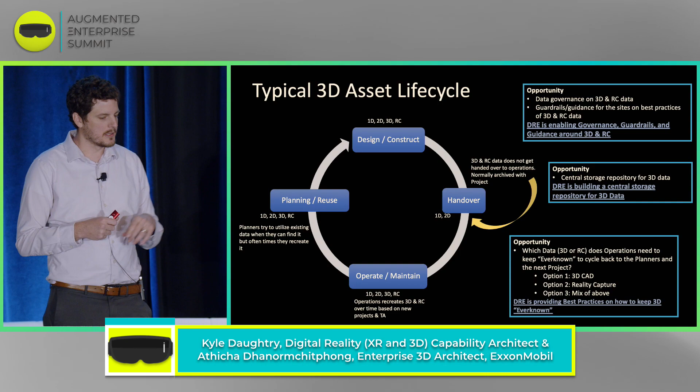Foundation and use cases - you've caught up to where we are now. Capture, store, deliver, consume, right? Set the foundation, stop the inefficiencies. We realized capture, store, and deliver were our foundational efforts. A lot of effort put into that to make sure, and then the consumption channel outputs anytime, anywhere, but use cases are going to drive that.

We've taken our ExxonMobil technology engineering company DIA process: discover, incubate, and accelerate. Discover that technology, you can kind of see where some of those use cases are. Incubate - let's test it out, pilot it at a site. Everything checks off, let's scale that out or accelerate. And again, you can see some of those use cases. For the sake of time, I'll leave it there, happy to answer questions, but we'll keep moving.

So we mentioned it before, split this out into foundation and use cases. There's a lot of things in the data space and simulation space that need to mature. But in the space of visualization, we've got two big things to solve. One's a 3D content management system that's independent from platforms, agnostic to storage of models, and allows us to govern our assets to be able to go into digital twin applications or field apps or whatever they are. There's a missing gap there - I'll put that out to the world.

Geospatial tag database - really, at the end of the day, once I actually have a digital twin, I need to be able to tag information in it. I need to be able to associate that back to our source systems. Being able to do that independently and move between applications is a requirement. There's no monolithic stack that's going to solve everything for you.

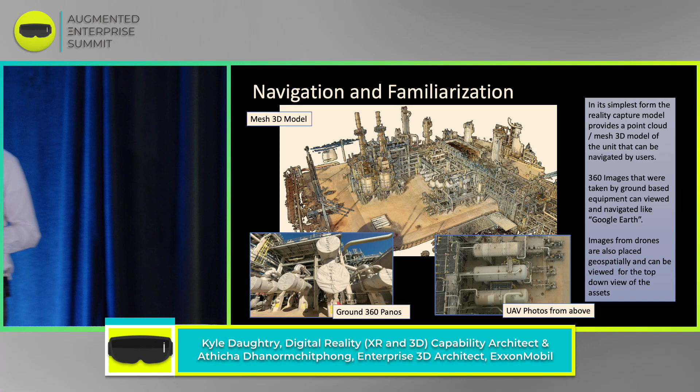Amen. Use cases in action. Wait, I think this is your turn. Rapid fire. Yeah, that'll work. I'll go for it. So really what we're going to show is just a couple of things back and forth.

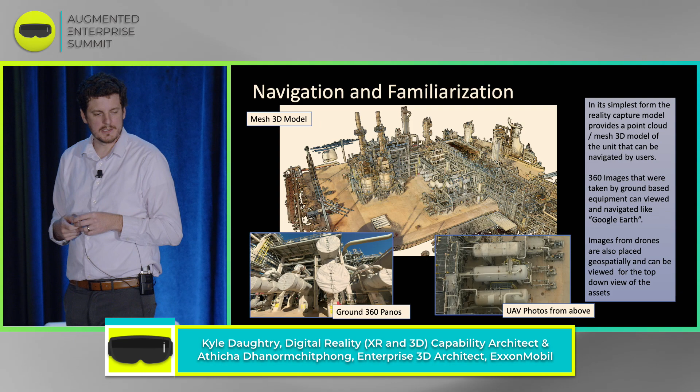This is one of our assets. Really, the basics of bringing reality into the world allows us to get just site familiarization, very easy navigation from panos to the actual scans of the facilities. So it's super easy to understand.

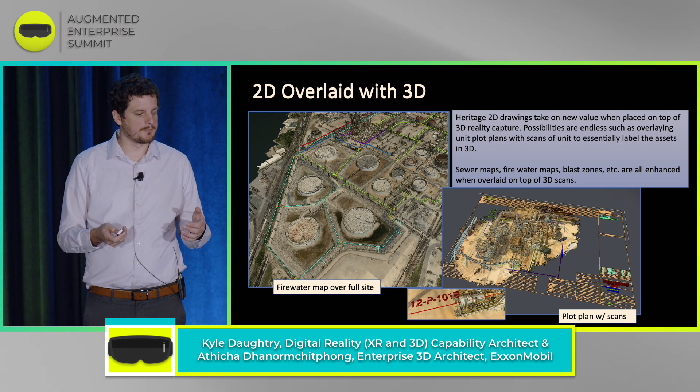Actually, I'll do this one to get us back on track. 2D overlays. At the end of the day, I can go from just creating reality to now I take the standard drawings that I already have, whether it's a blast zone, water maps, or even just plot plans, right? Bring that into the same environment and same area. Everything that we're talking about is trying to bring context to the individual at the time that they actually need it. Planning, scoping, design, troubleshooting.

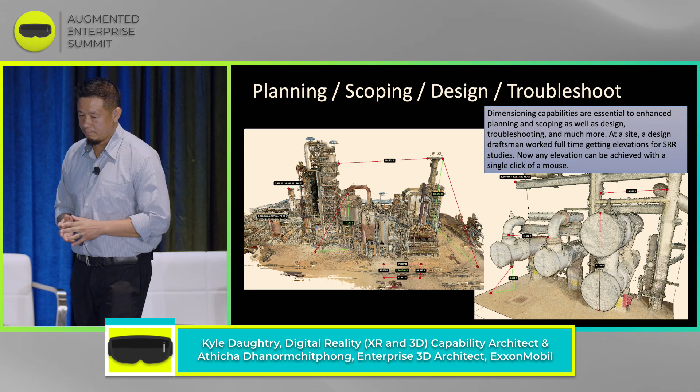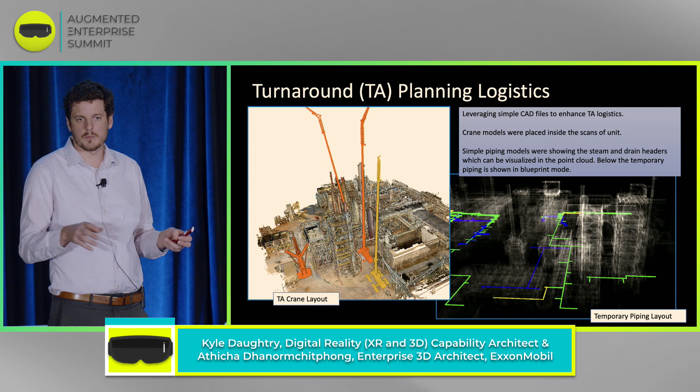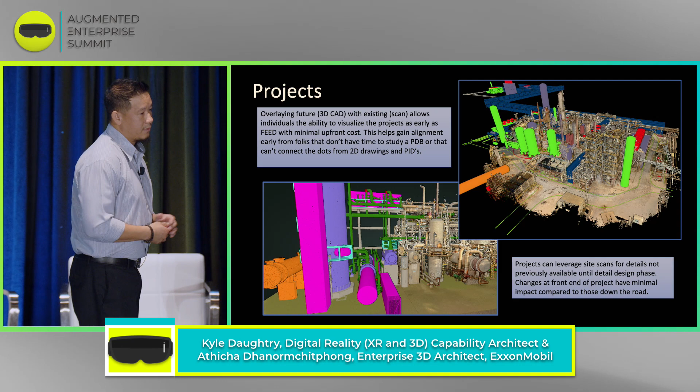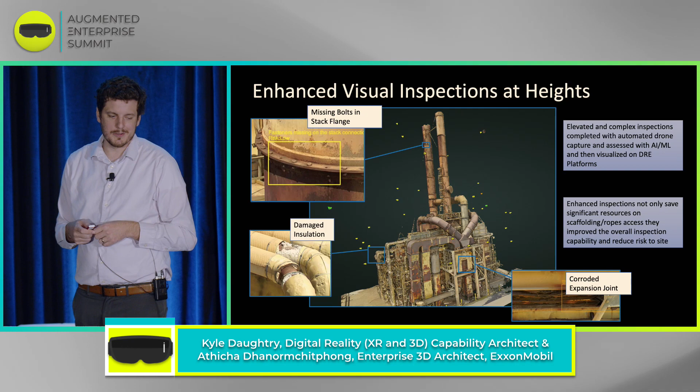Inspections. Really cool thing about this is taking drones and allowing us to capture 3D images, but also using AI to be able to detect things. And whenever I detect things, let me give you more context into the world by throwing an actual dot, red, yellow, green, of whether that inspection is something that you need to look at. Or if it's a hot zone, let me look at all the reds in this particular area. Allowing you to get more context, whether it's missing bolts, insulation damage, corrosion, expansion joints, could be anything, right?

But before that, right, instead of using a visual AI, imagine without AI, you got all those drone shots, and probably somebody's opening up a folder and trying to understand what those images are and where they are. That's what Kyle means by context. I'm going to show you where it is on that asset, so that way that's where the orientation is. And I'm only going to show you things that have anomalies visually.

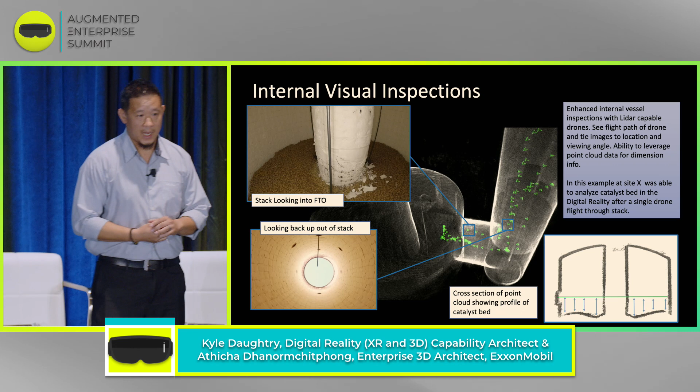Same thing with internal visual inspections, right? Instead of sending a drone for at heights, send it on the internals as well. This is a catalyst bed example.

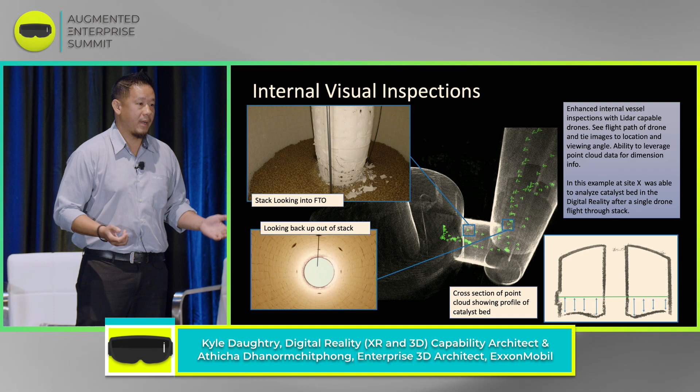So you see the trail of where the drone is, the images and so forth, right? We can even create a model inside if we needed to. But long story short, we're not sending folks in there.

Immersive tech is something we've been working on for a while. I think that training part should probably slide a little bit more into maturity. We've been using it for high consequence scenarios, trying to figure out those spaces you can't recreate in the real world, and allow people to actually do it virtually.

Design reviews using headsets to collaborate across the world, from Milan to Beaumont to Houston campus, all over the place. Connected workers, same thing, getting headsets into the field, or just tablets to allow people to connect, or construction progress tracking.

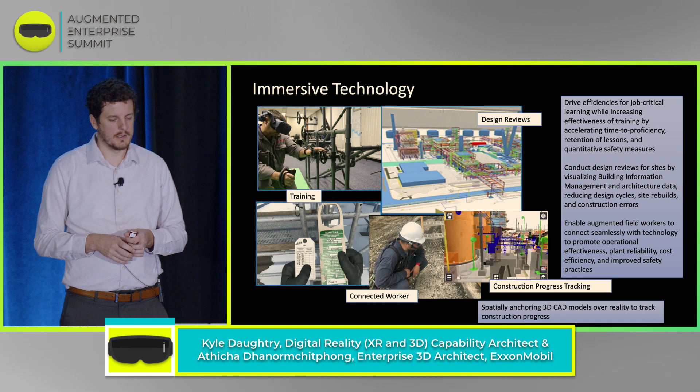We like to call this just 'will the couch fit?' Can I actually put this thing in this particular space?

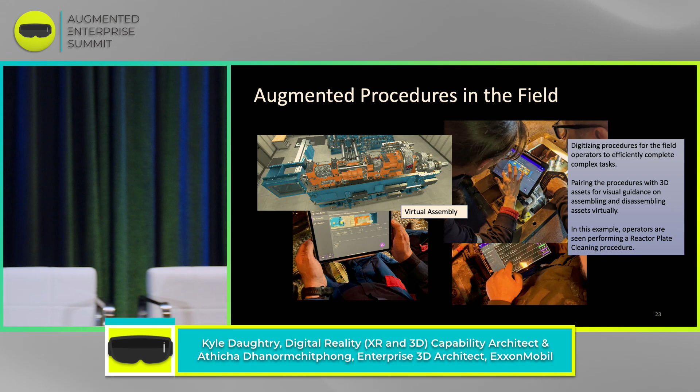Augmented procedures in the field. I heard somebody talking about this. I think it's pretty straightforward, right? But for us in our world, hundreds of tasks, hundreds of steps, not done frequently, there's big room for error. Now, instead of paper-based, how about digital procedures with animations to guide you step by step, so that way our folks in the field do not get hurt.

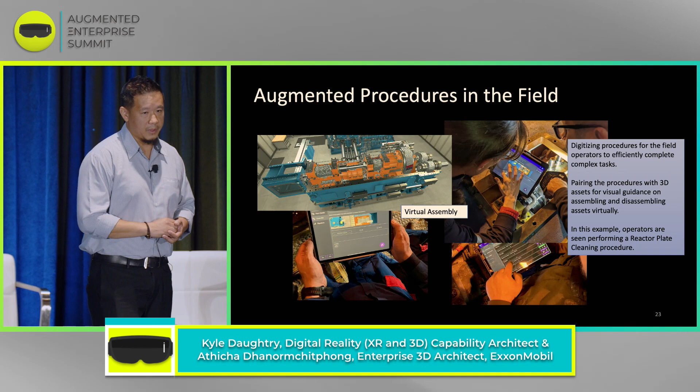All right, so I'm gonna fly through this fast. I don't know where the time is for us. We're good? Okay, cool. All right.

One of the biggest things for us here is actually transferring to a digital reality first, and I'll talk to you a little bit about what we mean by that.

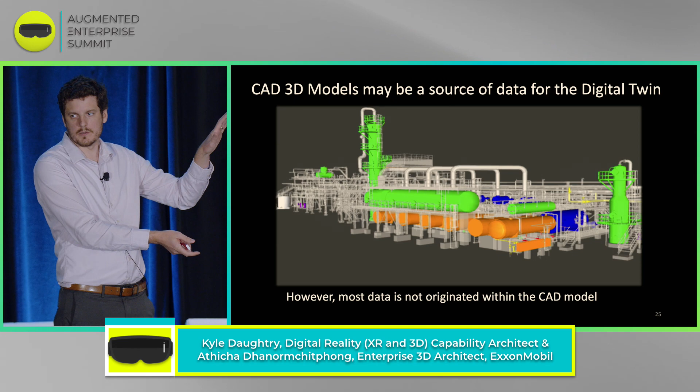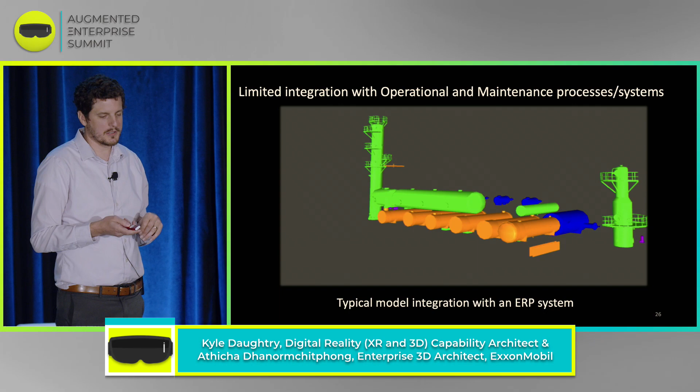If you kind of looked at what an ERP is, hopefully this is typical for like y'all's ERP systems, everybody else, you actually go from this to this. So this is what you know about inside of it. This to this, see that? It's the same thing, but boom, you're missing a whole bunch of other information.

So really, at the end of the day, there's a couple of things going on there. There's a process problem, but there's also just a technology problem in between.

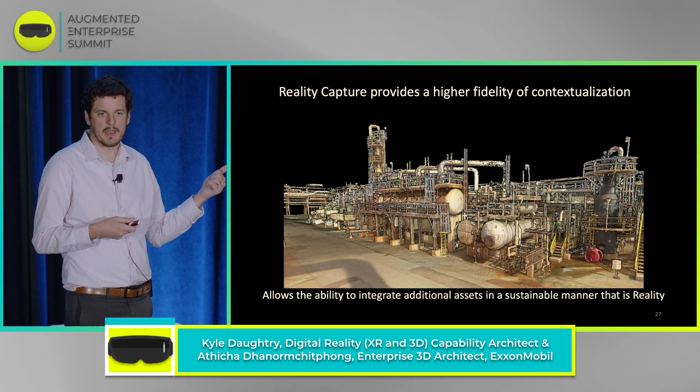This is actually a scan down to 1/4 of an inch of that same location. So I already get more context, just because I know where things are at. Even compared to this, I know where things are at.

And as soon as you layer in data and information on top of that, whether that's pulling the CAD model into reality and getting all the engineering information, or tagging a new thing, if I have an asset that doesn't actually have any CAD behind it, it becomes powerful. And that's been the biggest transformation for us.

Take a picture of it. That's really the concept, it's just with an extra dimension. But think about that trust level.

When we interviewed our sites, again, global scale, they said: I have my CAD model, but it's expensive to update. I still don't see reality. I still go walk out in the field.

But what happens in your consumer lives? You're checking Google Earth, you're probably using Street View, you're getting live information to trust that data, like things like what things are, where things are, and when. That's a lot more trustworthy, right?

And in terms of location, we're trying to fine-tune that as well, all the way from parcel level to our boundaries and things like that, down to probably a screw, exactly about 7 decimal places. There's a lot of use cases for us where we'd like to be able to really provide location services for our field operators, and that's something we're going to accelerate next year.

This is reality. It's just plain and simple. This is what our operators trust. It's a picture, something you can identify with as close as you can to reality.

We're not saying CAD models are gone, we're not saying they're not valuable, but we are saying we have shifted to reality first. Because of that, one of the major factors is trust. I mean, look at that picture, look at all the details that you have, that you need.

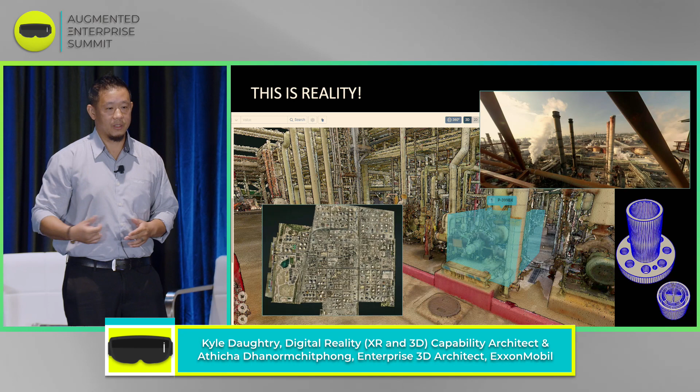All right, call to action piece. We really break it into those 4 pillars. One of them, capture. We need industry standards. I think there are already some great ones out there, but there's some that haven't matured, and we're trying to push those forward.

We need to understand new ways to capture things faster so our MOC processes are efficient. I think that's one of the big things where we see NeRF and all the other wonderful technology coming out there. It might not be engineering grade, but it's actually something useful to get visuals.

Storage, we already talked about it. We need a 3D content management system, and we need an open and interoperable geospatial tag database. That's on me now, huh?

Delivery, segmentation of reality capture. We told you we chose reality first. But if you think about reality first, there's some things we need help on, segmentation specifically. So, for example, if I took a laser scan of this chair, I'm getting X, Y, Z's on a table, and then it maps out into a picture. But if I click on it, how do I know that entire X, Y, Z's really consists of this chair?

I need that to be completely segmented in my point cloud data. I don't want to have to do it by hand. We're looking for an automated way for that with an 80% confidence rate or higher. Maybe you got to sprinkle a little bit of time in that equation, but that's one of the reasons why we're out here.

Same thing with classification. I don't want to have to tag it myself, but I know that this is a chair, I know this is a pump, I know this is a heat exchanger, a flange, and so forth. We need that to be automated.

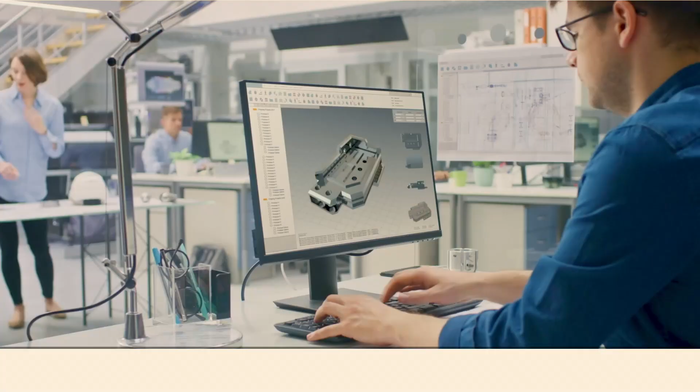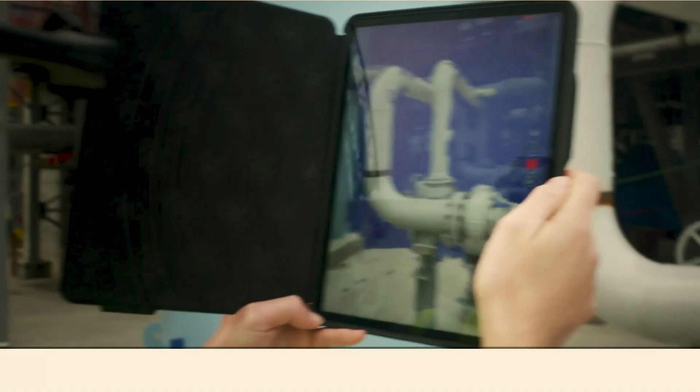From laser scanning to virtual reality, 3D models and other digital data captures are quickly becoming must-have technologies in our industry. Globally, ExxonMobil has spent tremendous resources on independent 3D efforts, from capture to creation, and even purchased visual assets. These 3D models help us gain better insights, make informed decisions, visualize disparate data, and streamline innovation. However, many of our 3D assets are stored in various locations and used locally when they could be leveraged across ExxonMobil facilities. As part of a company-wide initiative, we're establishing a digital reality ecosystem, which will serve as a foundation for our 3D visual assets platform. This ecosystem will help us capture 3D models in formats that everyone can use, centralize where they are stored, and automate the way they are delivered, so they can be used by anyone, at any time, from anywhere. This ecosystem will allow us to move toward a more visual way of working with contextualized data, which will be essential to our success for corporate scale and integration, now and in the future.